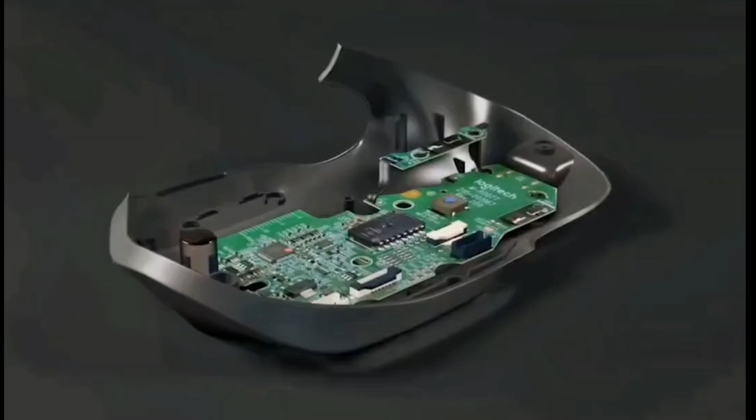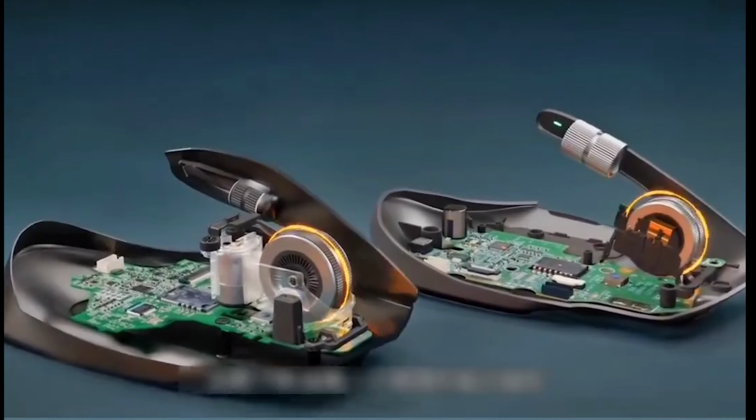I have always been curious about how the mouse wheel controls the page to slide up and down. This is a commonly used light-emitting mouse. It mainly has three key components: an infrared LED that emits light, a lens installed on the LED to collect light, and on the other side, two optical sensors that detect light, with an encoder mounted in the middle of the wheel. The encoder has 48 equidistant spokes that rotate as the wheel does, appearing somewhat like the spokes of a bicycle wheel.

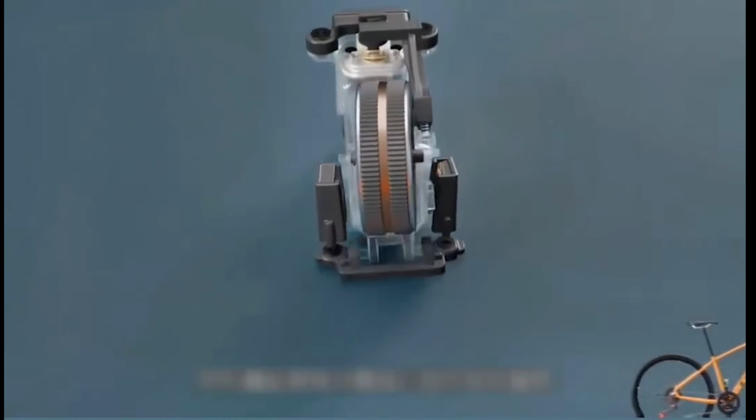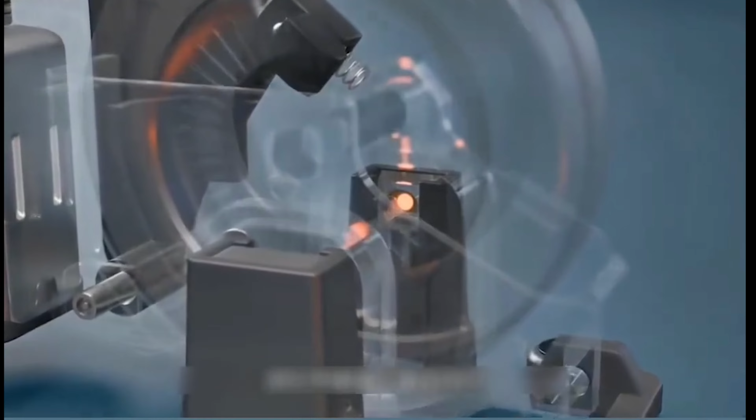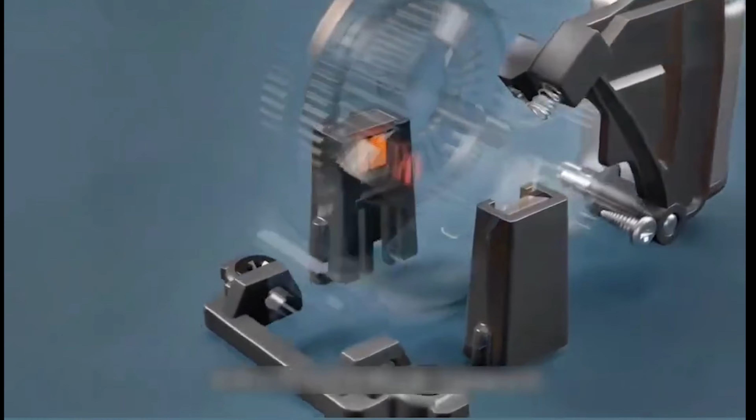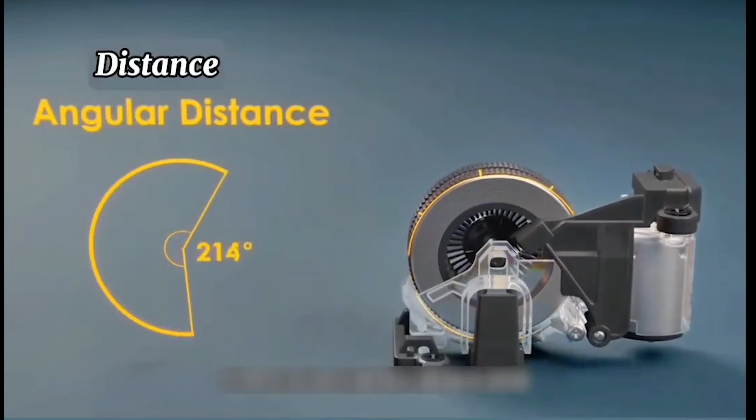So how do these three components work together to control the computer page? The roller carries an encoder, and when it rotates, the rotating spokes intermittently block the light emitted by the LED, and the light passing through the gaps is received by an optical sensor, which converts the optical signal into a pulse-wave electrical signal. When the wheel rotates once, the sensor receives 48 instances of light and generates 48 light pulses. This pulse signal, transmitted to the computer processor, contains information including the angle and speed of the roller's rotation. The processor can then convert the angle and speed into the distance and speed at which the page should slide.

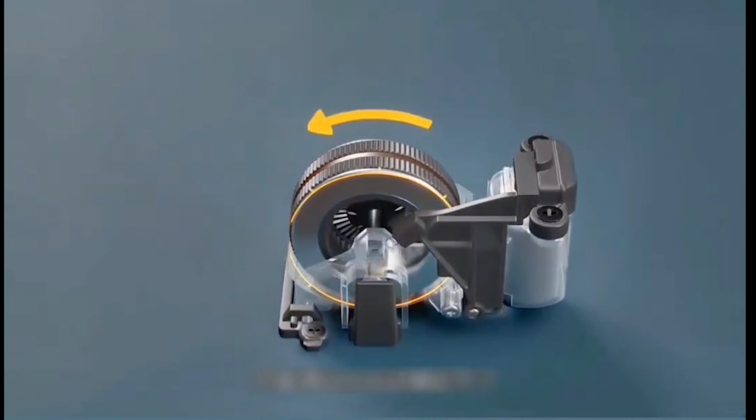However, there is another problem: the sliding direction of the page cannot yet be determined. This is why two optical sensors are installed. When the roller rotates, two adjacent optical sensors will detect the light one after the other. Based on the detected light, the different directions of the roller's rotation can be determined. The principle of sliding the mouse wheel up and down corresponding to the page is very simple: first, convert the mechanical rotation into an electrical pulse signal, and then convert it into the distance, speed, and direction of the page sliding.

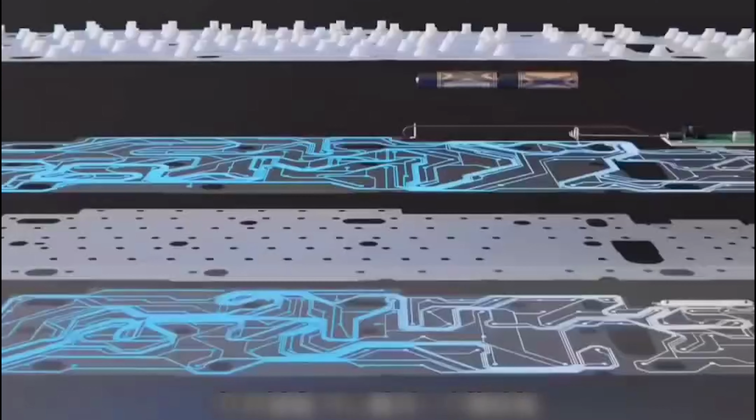The inventor of the keyboard was a true genius. Externally, a keyboard comprises keys, a housing, and screws. Upon opening the keyboard, one can observe a rubber mat, each protrusion aligning with a key. Beneath this mat lies a circuit board interlaced with wires. Situated on the upper right side of the keyboard is the battery, adjacent to which is the microprocessor.

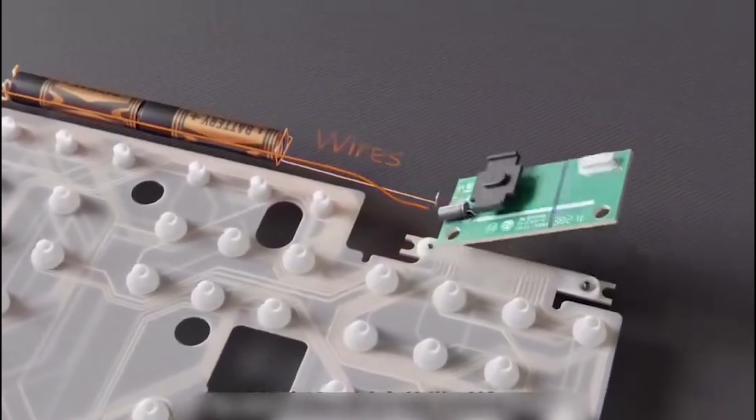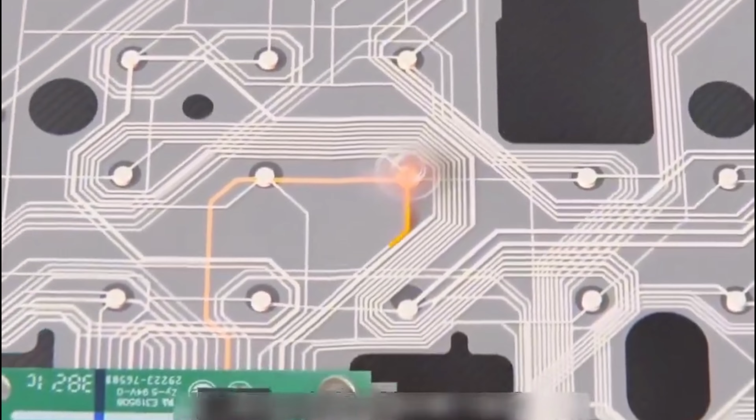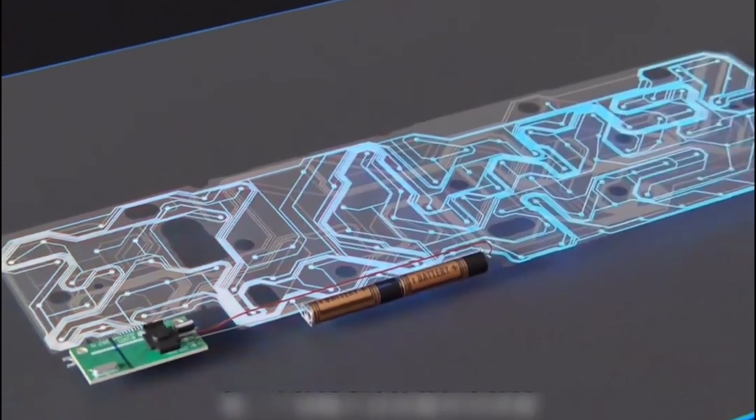Pressing a key creates a complete circuit loop on the board, signaling the processor to identify the pressed key. Releasing the key breaks the circuit. Despite there being only 11 contact points between the circuit board and the processor, with each point connected to multiple keys, the system can distinguish over 100 different keys. This is achieved by assigning each button a unique row and column number. For instance, when the Y key is pressed, corresponding to the second row and fourth column, the processor identifies it based on pre-established numbering rules.

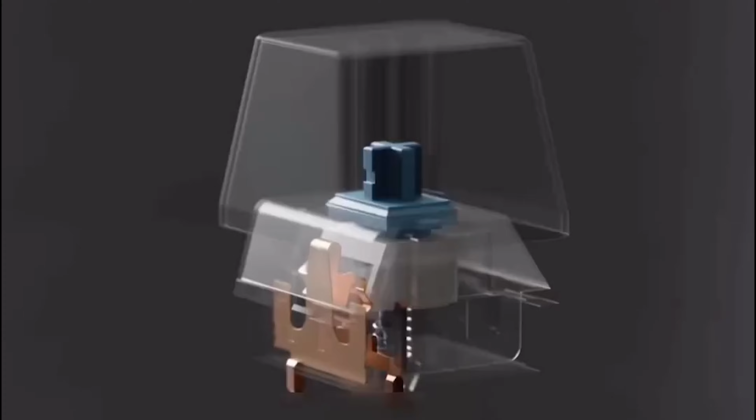A mechanical keyboard operates similarly to a regular keyboard, but differs in that it has an individual mechanical switch under each key. Pressing a key causes two metal contacts to meet, forming a circuit and sending the signal to the processor. As a result, mechanical keyboards produce a louder click sound than their membrane counterparts and are more expensive.

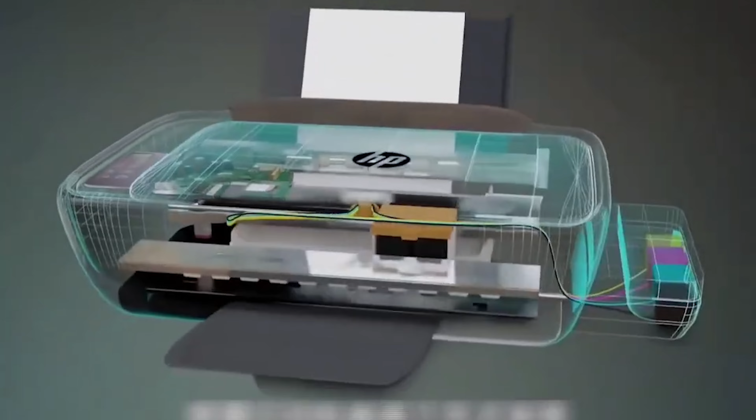The inkjet printer is such a genius invention, but it's a pity that this device is still monopolized. If we enlarge the printed photo, we will see that it is made up of tiny ink droplets. Not only that, but the printer can print with only 4 kinds of ink. What is the magical principle behind this?

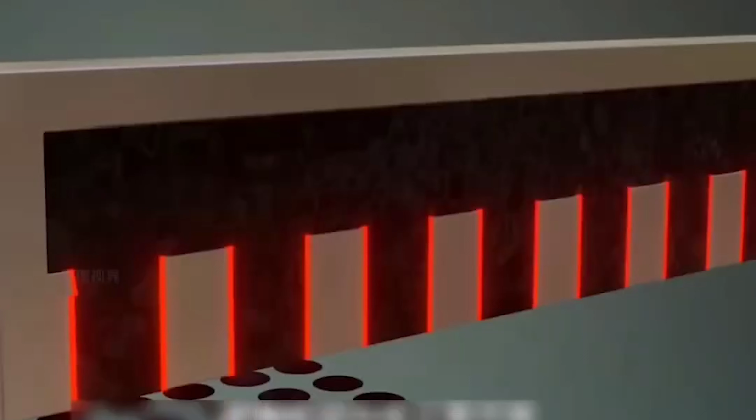The core lies in the nozzle. There are a large number of nozzles distributed on it, each thinner than a hair. The nozzle is designed to be wide at the top and narrow at the bottom, which creates negative pressure. Once printing starts, the heating resistor above will heat the temperature to 100 degrees in 0.000001 seconds, and the high temperature will cause the nearby ink to form bubbles.

These bubbles act as pistons and push out the ink below. Due to the viscosity of the ejected ink, it will form a main droplet and a trailing droplet. They fall at a speed of 10 meters per second. The nozzle is 1 millimeter away from the paper, so it only takes 1/10,000th of a second to reach it, and it is absorbed by the paper in a very short time.

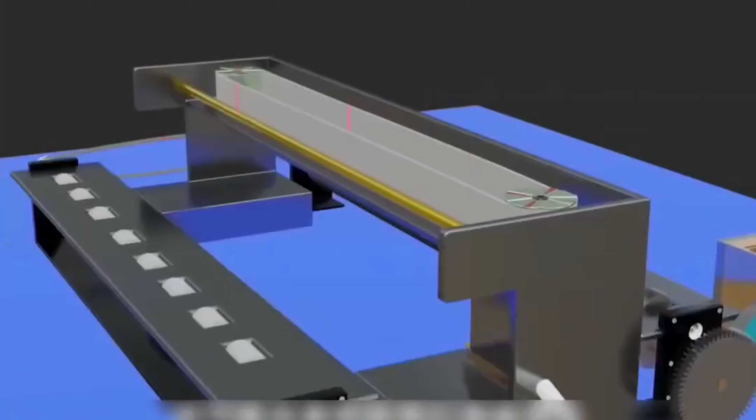This is the basic structure of the printer. So how does one use 4 inks to print colorful photos? You might think of using a mix of red, green, and blue.

Let's do a small experiment first. If you use a red and green flashlight to add and mix, you will get yellow. But if you mix red and green ink, you will get a very turbid yellow. In fact, this is the difference between additive color mixing and subtractive color mixing.

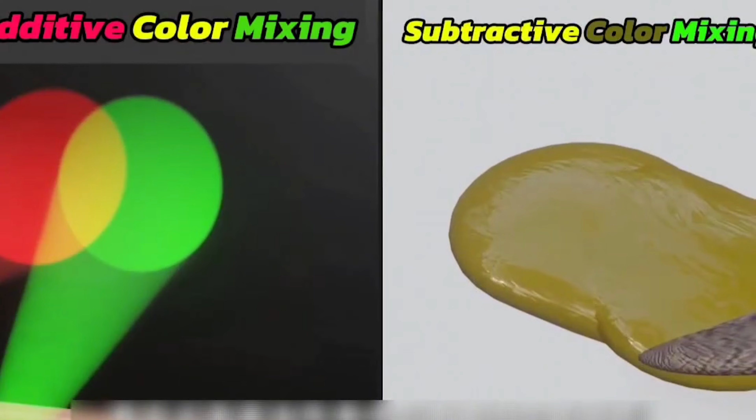For self-illuminating shades, mixing the two colors increases the brightness, but the ink itself does not emit light. We can see the ink because light hits the ink and then reflects into the human eye. This process will filter out part of the light.

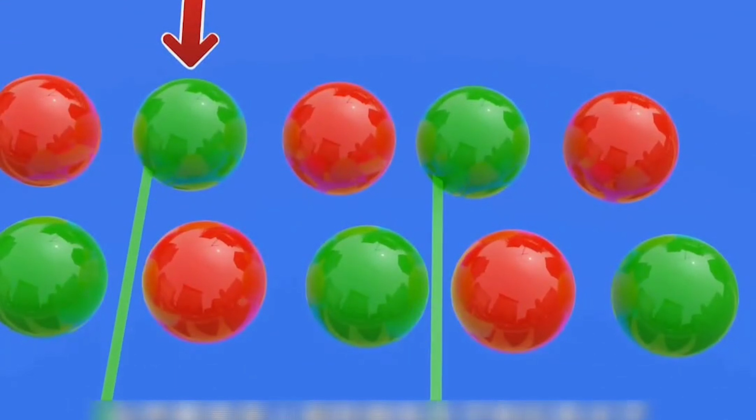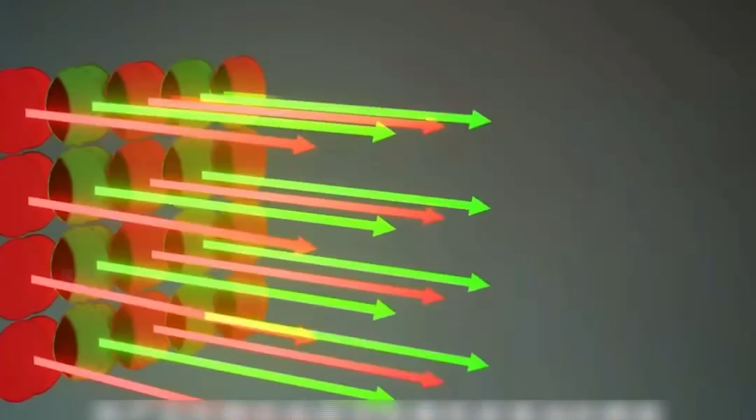To give another popular example, the gray hair we see with the naked eye is actually the result of a mixture of white and black hair. So obviously, the 3 primary colors of red, green, and blue cannot be used directly in the printer. The solution is easy: just replace red, green, and blue with their complementary colors: cyan, magenta, and yellow.

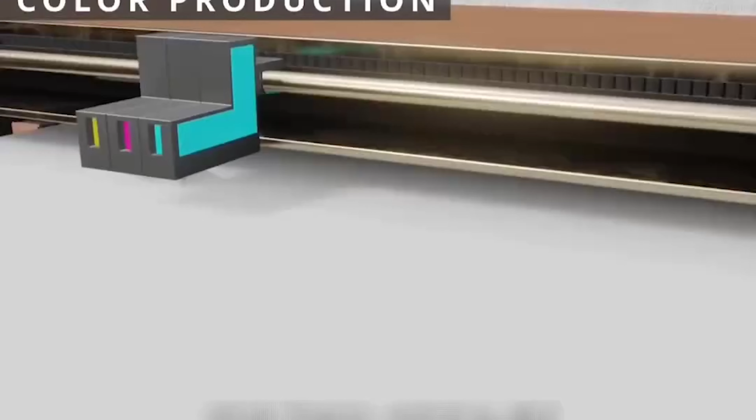When the nozzle releases a drop of cyan ink and then quickly releases a drop of yellow ink, the two mix together to create an intoxicating green color. The diameter of the mixed droplet is only 0.05 millimeters, and a variety of colors can be obtained in this way.

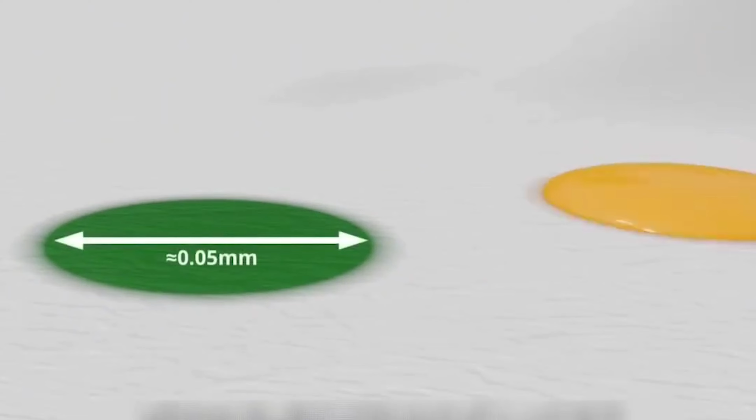So what should you do if you want a lighter green? In fact, you can get a lighter green by increasing the spacing, which will make it appear lighter, but the spacing is always limited. What if you want a darker green?

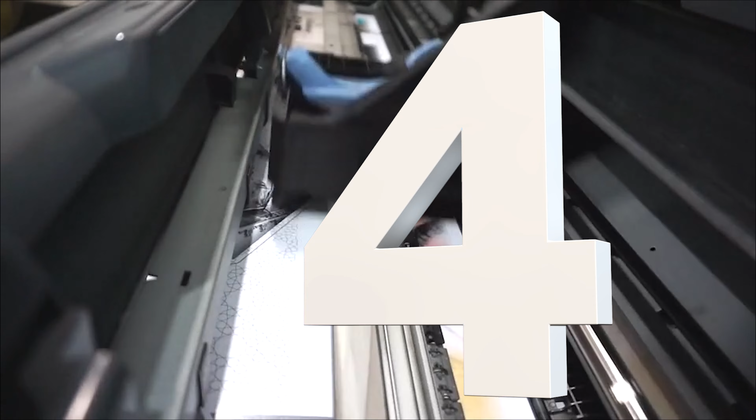It's astounding how laser printers work. We all know that static electricity can attract things, but laser printers can actually control static electricity to adhere toner to the paper to form an image.

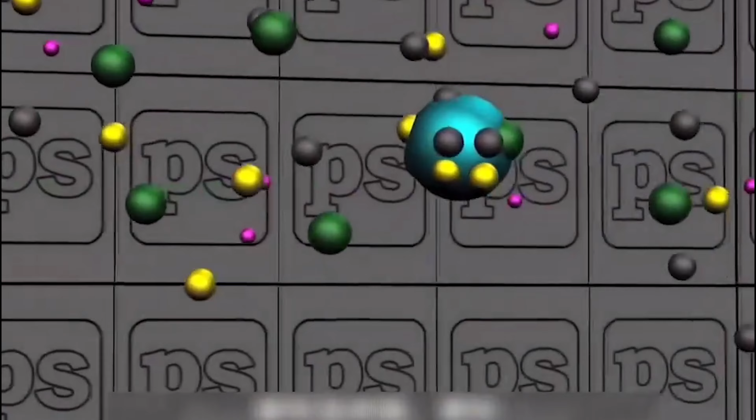Toner is made of resin, pigments, and charge control agents, and has a diameter of only 0.005 millimeter. The core of the laser printer is the photosensitive drum, whose surface is full of negative charges. The photosensitive drum has a characteristic that it can remove static electricity after being illuminated. So when the laser shines on the photosensitive drum, the negative charges in the illuminated area become positive charges.

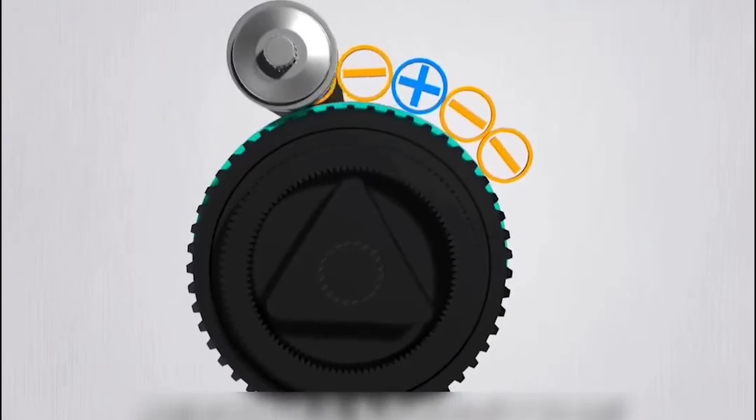Next, the developing roller transports the toner to the surface of the photosensitive drum. Since the toner itself has a negative charge, the positively charged areas of the photosensitive drum will be stained with toner, and the excess toner will be taken away by the sponge roller next to it.

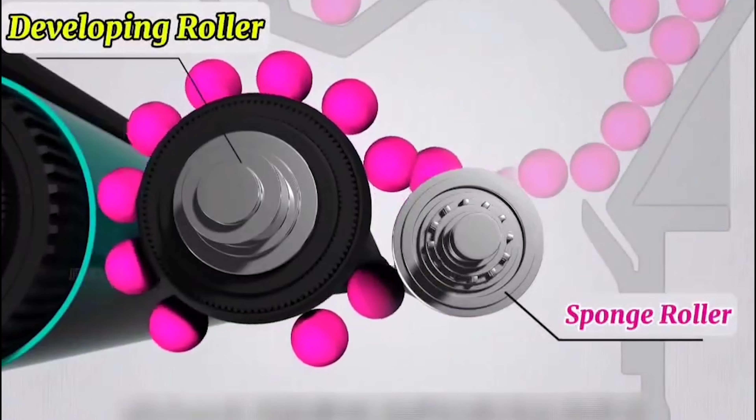Now let's watch it in full. The sponge roller transports the toner to the developing roller. When the photosensitive drum is irradiated by the laser, the positively charged area will be stained with toner, and the positively charged area is the image we want to print.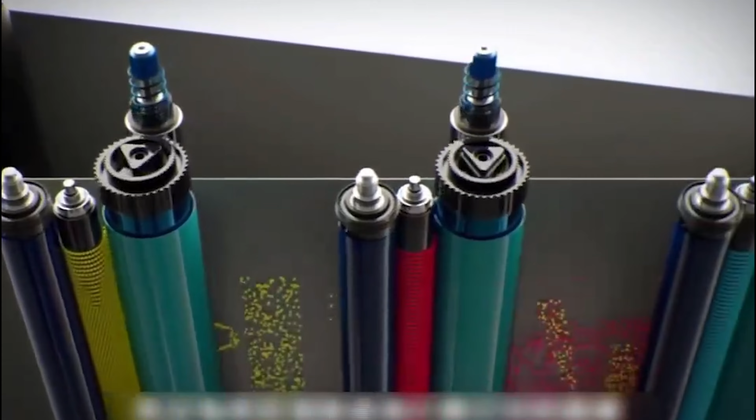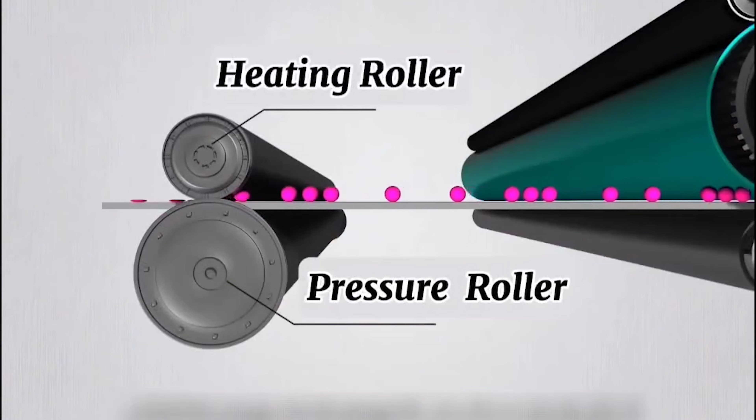There is also a transfer roller below, which is responsible for pulling the toner off the photosensitive drum and attaching it to the paper. After being heated by the heating roller and pressed by the pressure roller, these toner particles are firmly adhered to the paper. On paper, the final image we need is formed, and all this process is completed in just 1 second.

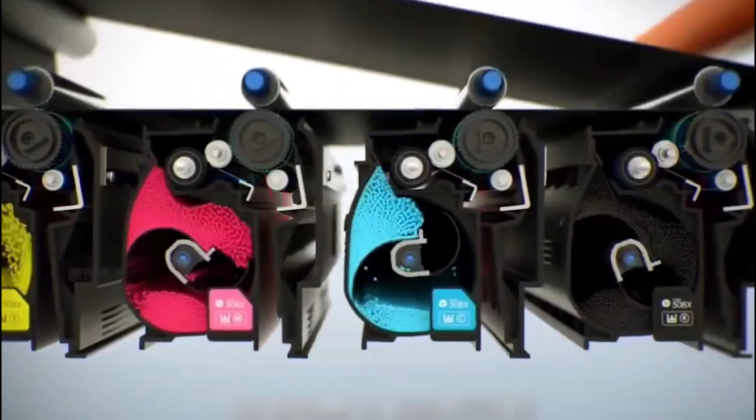But what should I do if I want to print a color image? In fact, just repeat the above steps 4 times to absorb yellow, magenta, cyan, and black toner respectively. Just like ink, these 4 colors can be mixed to produce tens of thousands of colors, resulting in a colorful image. However, the cost of color printing is too high, so laser printers are more suitable for printing text and photos, and inkjet printers are better for color images.

Why do others always take better pictures than you when you take pictures with a camera? It's because you don't understand how digital cameras work.

Through this video, we learn how a digital camera acquires data from tens of millions of pixels and processes it to restore a painting within 1 second.

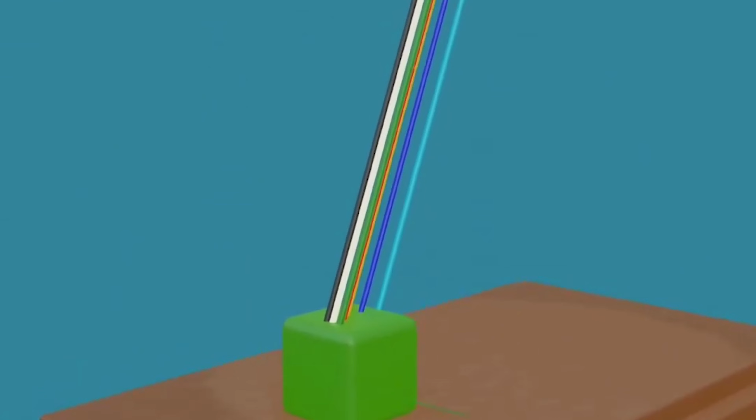We see the box on the table is green because light shines on it. This box absorbs light, and all colors except green are absorbed; green, which is not absorbed, will be reflected, reaching our eyes. After processing by the brain, it tells you that this is a green box.

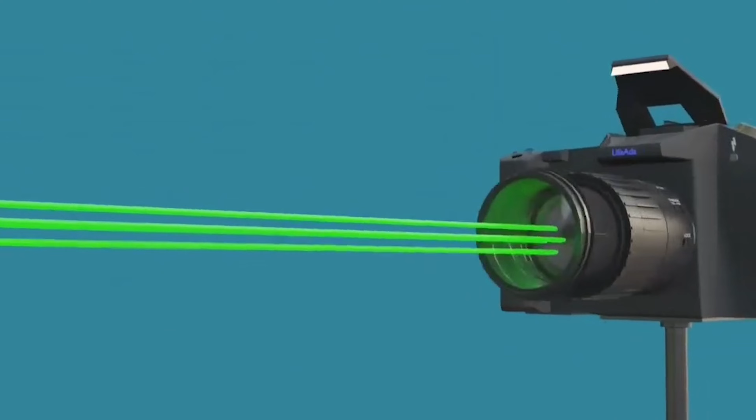Similarly, when reflected light reaches the camera, it first enters through the camera lens. There is a set of concave and convex lenses in the lens, which are used to enlarge and reduce the image. This process is called optical zoom.

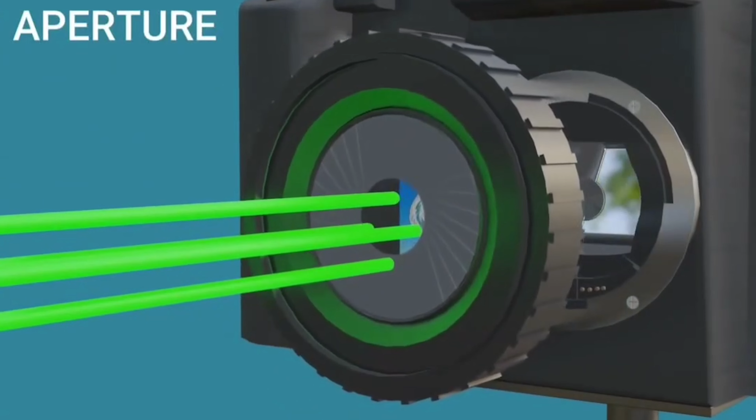The hole in the middle of the lens is called the aperture. It consists of 5 to 9 aperture blades. By controlling the opening and closing size of the holes, it can increase or decrease the light entering the camera. The aperture is very important for photography, which will be explained in detail later.

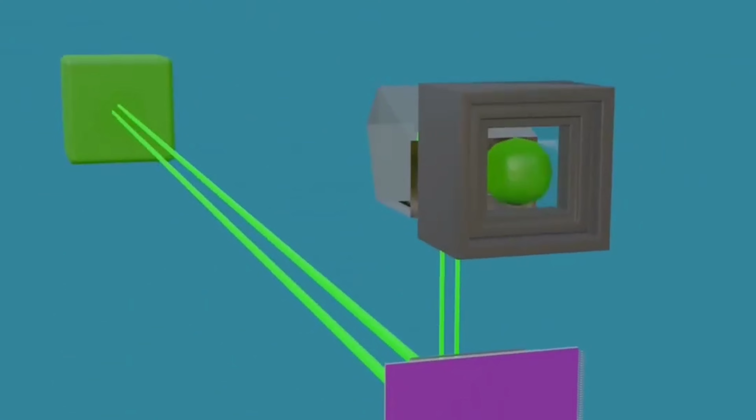When the light passes through the lens and reaches the main mirror, the camera begins to work truly. The main mirror, set at an angle of 45 degrees, reflects all the light to the pentaprism, located directly above the main mirror. At this time, we can clearly see any object in the viewfinder.

Its opening and closing are all controlled by being driven by an independent micromotor, and it can open and close in as little as 1/8000 of a second. The function of the shutter is to control the exposure time of the camera.

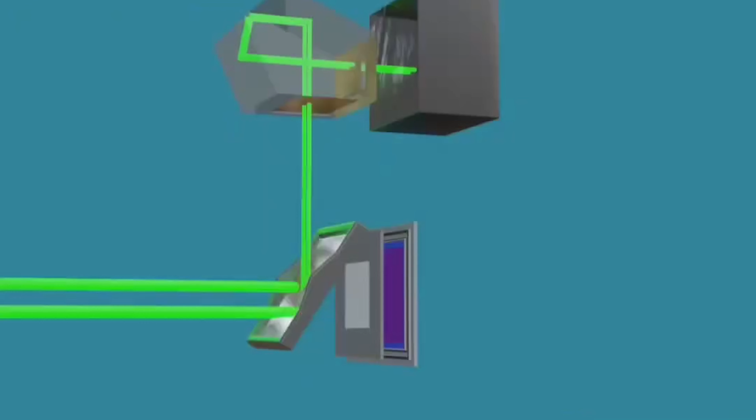When we press the photo button, the main mirror will flip upward, blocking the viewfinder and releasing light toward the shutter. The shutter consists of 2 curtains, blades used to block light. When light reaches this point, the lower curtain leaves will fall.

Light passes through the shutter and shines on the image sensor. When the shutter is open for a specified time, a second curtain falls from above to block the light. At this time, the shutter returns to its closed state.

Next, it's time for the image sensor to start working. It can be said to be the heart of the camera. After we enlarge it, we can see many squares, which are all pixels. Suppose you have an 8-megapixel camera, then its image sensor will have 8 million pixels.

Each of these pixels is a photodiode, which is similar to the working principle of a solar panel. Once light shines on it, all the electrons in it will begin to move and create an electric current.

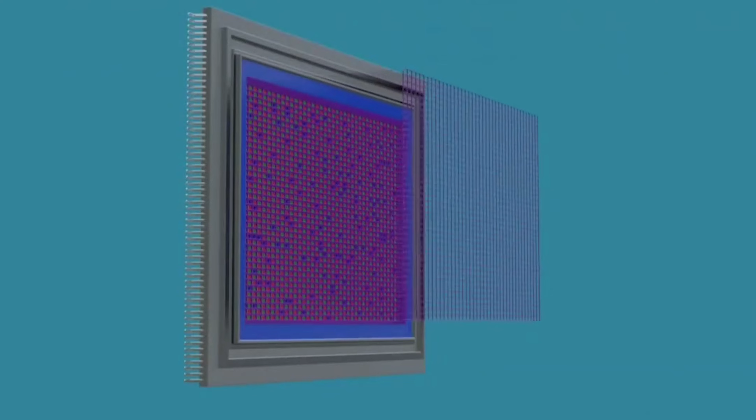It is divided into 3 layers. The top one is the micro lens, and the middle one is the color filter. The bottom is the photodiode, which is what we call a pixel.

Let's take a look at how individual pixels work. In fact, the camera only has 3 colors, red, green, and blue, but the combination of these 3 colors creates other colors. The first is the micro lens, which is responsible for focusing the light on the pixel.

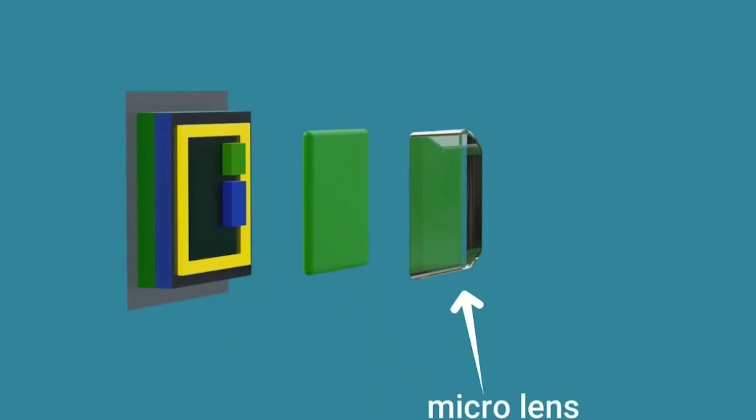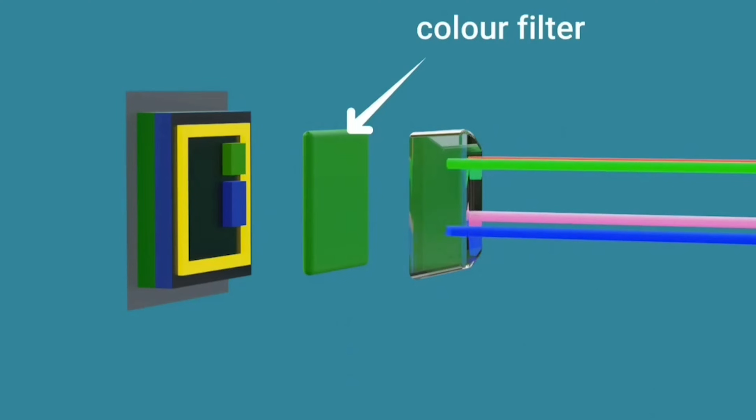So when the light reaches the green device and passes through the micro lens, the green device will recognize these colors and combine them before passing them to the photodiode. It is a light-sensing device that converts light into electrical current. In fact, this photodiode is a PN junction.

When light shines on it, the electrons inside start to move. The faster the electrons move, the greater the current intensity.

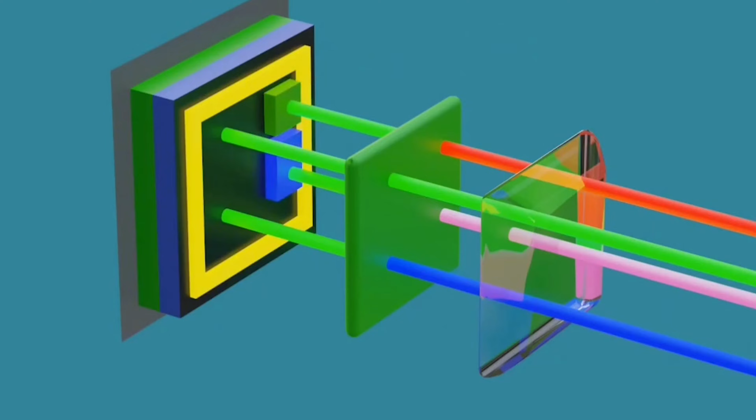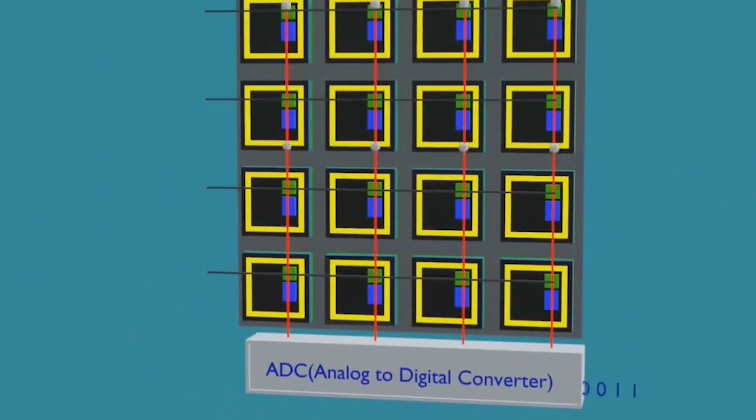Each pixel is equipped with a capacitor and amplifier. The capacitor stores the charge and prevents it from being lost. The amplifier amplifies the charge and sends it to the converter through a bus, and then the converter converts the current intensity information into 0s and 1s, and then transfers it to the memory to form the photo we want. All the above operations are completed when you hear the camera click.